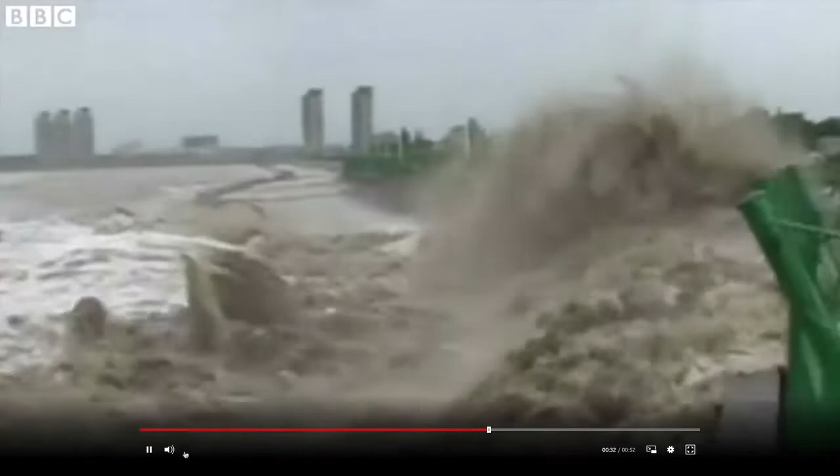Bit late maybe for us because we talked about waves a couple of weeks ago now, but tidal bores are things that happen from high tides in river mouths of a particular geometry, and come up as a solitary wave to invade the estuary, and can be quite violent. They occur in a place like the Bay of Fundy, between Nova Scotia and the rest of Eastern Canada, and the Severn Estuary in Western England as well.

Getting wave after wave, whereas here in China on the Silver Dragon, there's one wave, and it's once a year. So you really have to be ready, have your team ready, water related, and you can go with the flow, and just hope you get a little bit of the Silver Dragon. I think with this event on every year, it's just going to grow and grow, and surfing in China will eventually become bigger.

I don't know if Penn State has a sailing club. Does anyone sail dinghies like this? So you're familiar with this activity. Used to be Penn State had boats to rent at Stone Valley. I don't think they do that anymore.

Royal Air Force No. 617 Squadron attacked German dams in Operation Chastise, otherwise known as the Dam Buster Raids. 617 Squadron was formed specifically to attack 3 major dams that provided hydroelectric power and water to the Ruhr Valley, an area of enormous industrial significance to Germany.

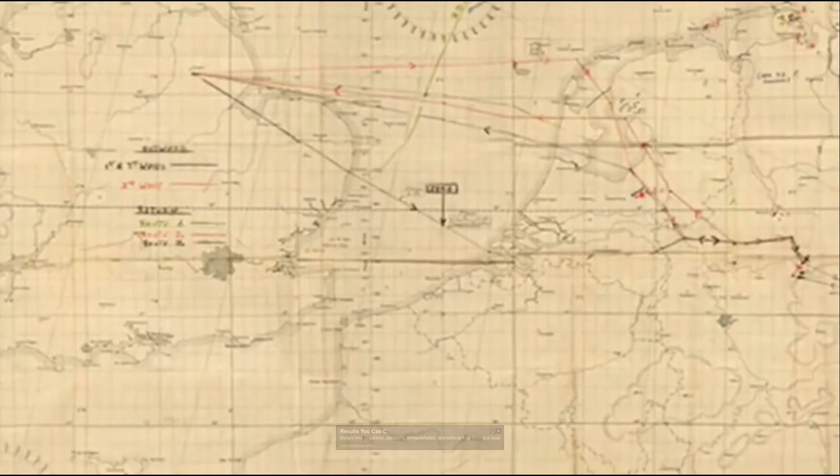The squadron began their mission from RAF Scampton on the evening of the 16th of May. Arriving at their targets in the early hours of the 17th, they breached 2 of the dams and lightly damaged the 3rd. 8 of the aircraft were shot down during the mission, and 53 airmen were killed.

Okay, it's probably about time to get going. So the first few things we already looked at, clearly there's relevance to these. Maybe it's worthwhile just recapping to make the case for the relevance of those initial forays into what we're talking about: pressures on structures.

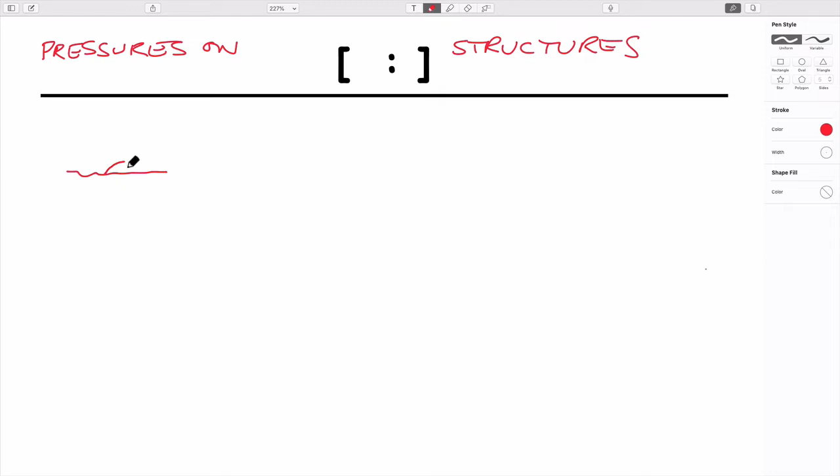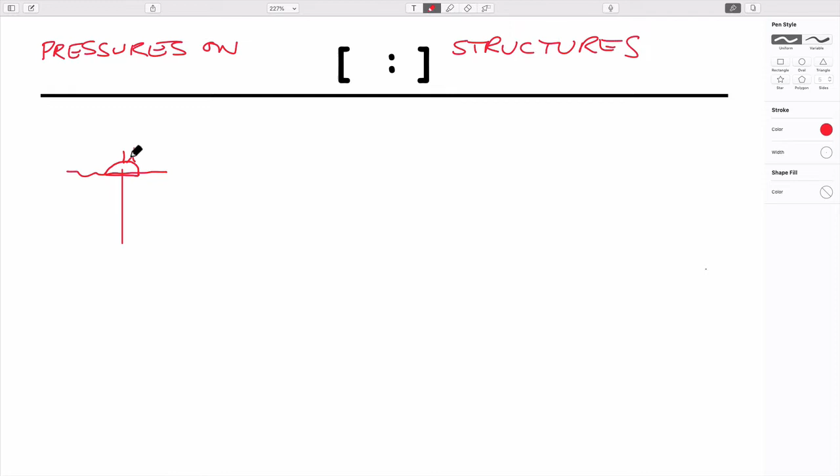So we can probably use those to illustrate the points we're interested in. In the first case, this upside down boat has a sail attached to it, which is a plane, a centerboard, someone standing on here, reefing on this to pull it up.

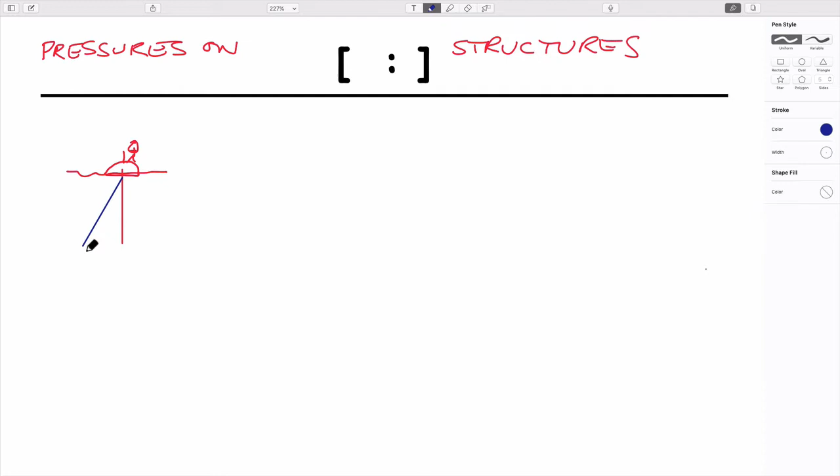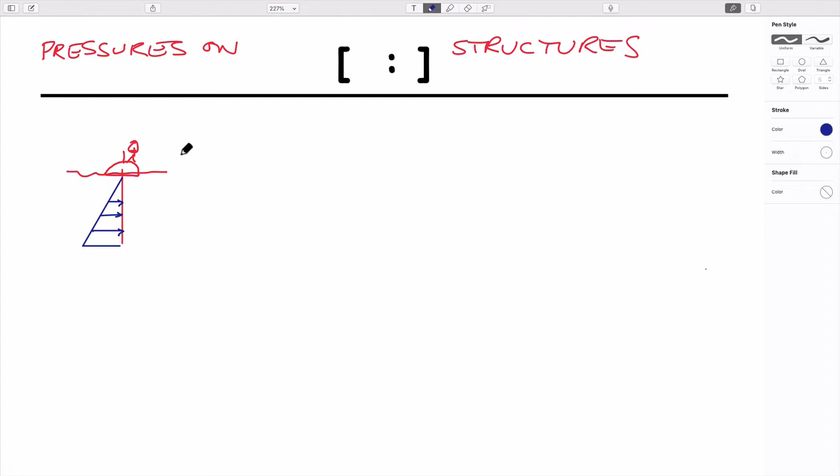Clearly the relevance to this class is that if you look at the pressure distribution applied on the sail - of course the sail can move around a little bit - the pressure distribution applied on the sail is something you have to pull against to right it.

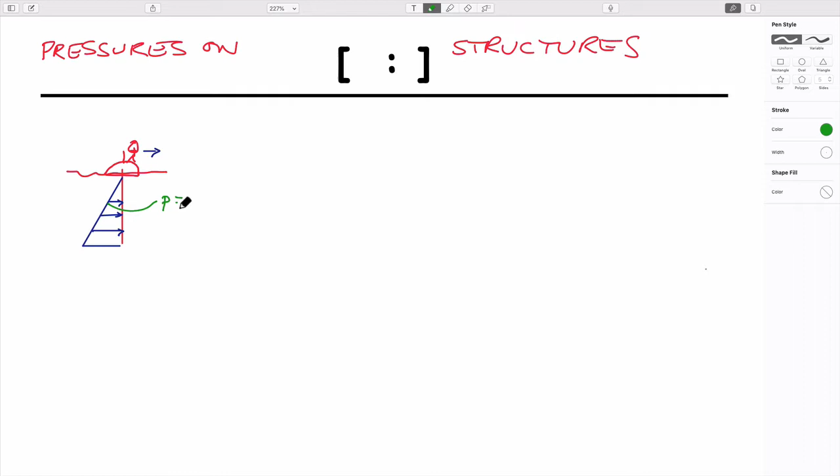So it embodies all the main points we talked about last time: there's a pressure distribution which we can define, because the pressure at any point is equal to gamma h, where h is the depth. We know we can get the magnitude of the resultant force that acts here, and this is always equal to the area it's applied on, the depth of the centroid, and the unit weight of the fluid, which is water in this case.

And as a special case of this, last time we also talked about the location. Is this off the screen? Sorry about that.

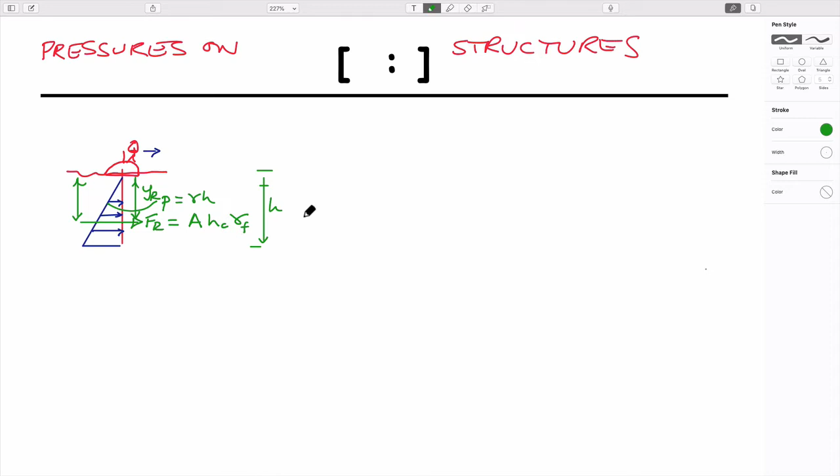We can also talk about the location of where this occurs. If this is h, then this depth to the resultant is what we called y sub r. In our particular case, y sub r was equal to 2/3 of h. hc is the depth of the centroid, which is equal to the height over 2.

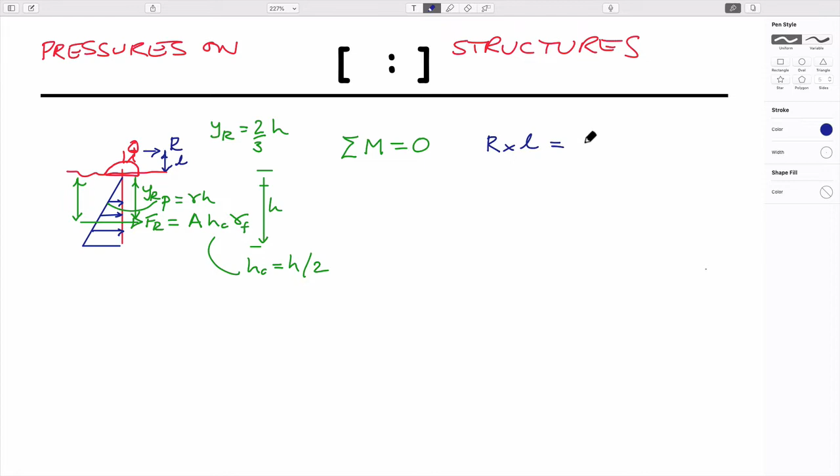So we have enough there to be able to calculate the sum of the moments equal to 0. In other words, this lever arm here - is that on the screen or off? Oh, it's off the screen. This lever arm here, L, and the reaction by the person. So we know that R times L has to equal FR times Y sub R.

So that's kind of really what we're trying to do in a very simplistic way. And so that embodies the three things we talked about last time that we need to be able to do. First, we need to get the force magnitude. And that is, in a generic case, the unit weight of fluid, the area that it acts on, and the depth of the centroid of the plate. We need to be able to find out where it acts.

Which we call YR, the location of the resultant, and it's relative to any particular location, typically relative to the surface of the water, which we developed an expression for last time - but it's not generic, so we'll go revisit that today. And the other point is what I call define a failure mode.

You might remember that we got this point of action by taking moments. It could be around any point - around the bottom of the sail, or around the top of the mast or the base of the mast. You could take moments around either one and come up with this expression. But explicitly, if you want to know whether you can right the boat, the moments have to be taken around the rotation point you're looking at.

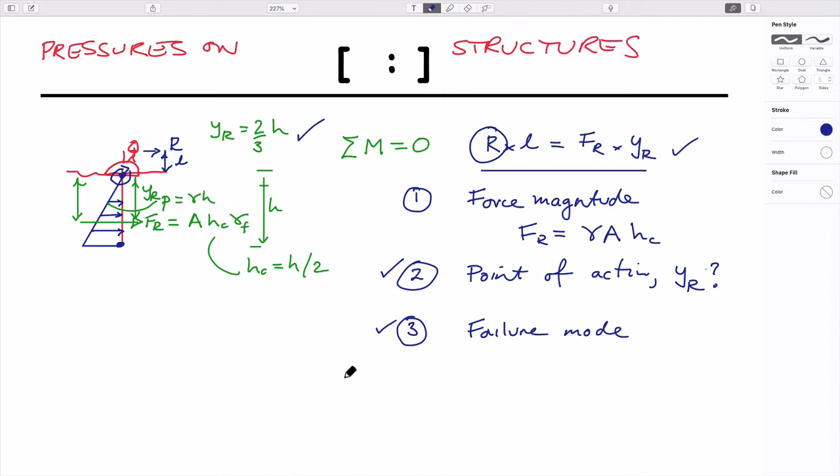So that's what we'll try and talk about today. Two things maybe today. We'll do some examples, but we'll talk generically about how we get this point of action, and we'll do some examples with different failure modes to represent these behaviors.

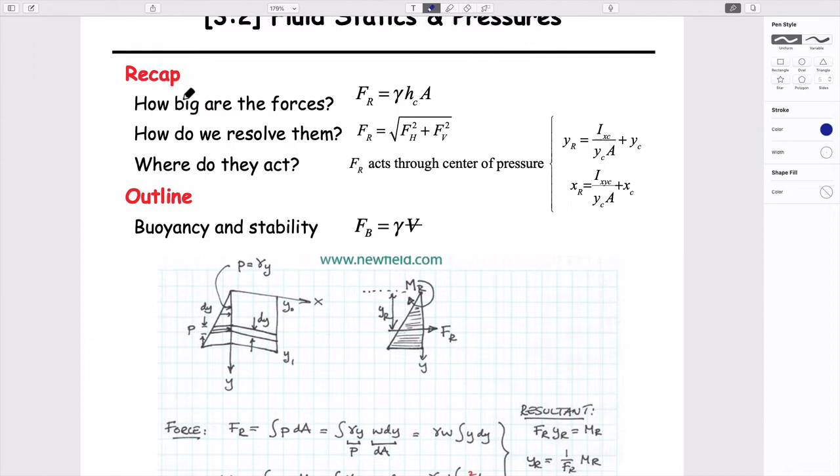Let's see where we are. Okay, so I'll go back to this. Hopefully you can see much of this. Good enough. So those are the things that we've said already. We've made this point that we know how to get the forces.

This is generic, maybe always true. If we have forces in the x and y directions, we can always get the resultant of them - I guess these are horizontal and vertical. We can always get the resultant of them from Pythagoras, which is merely what that is.

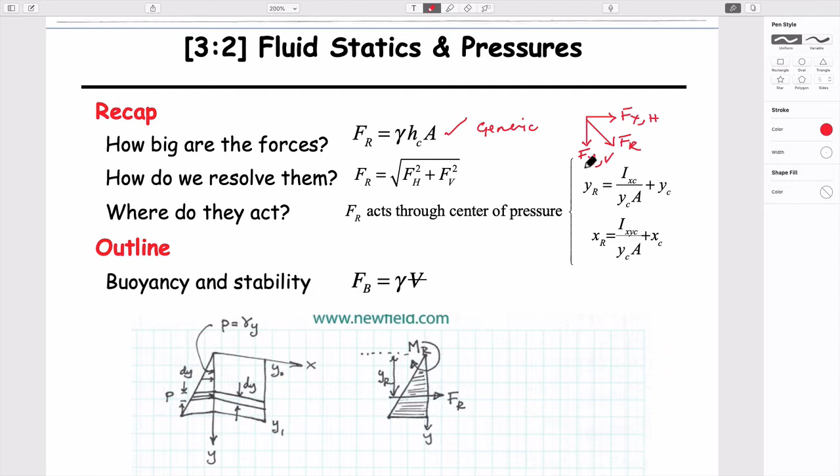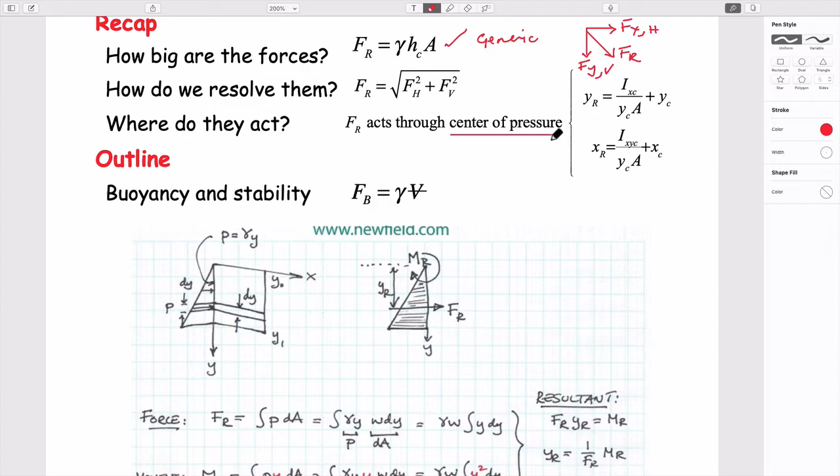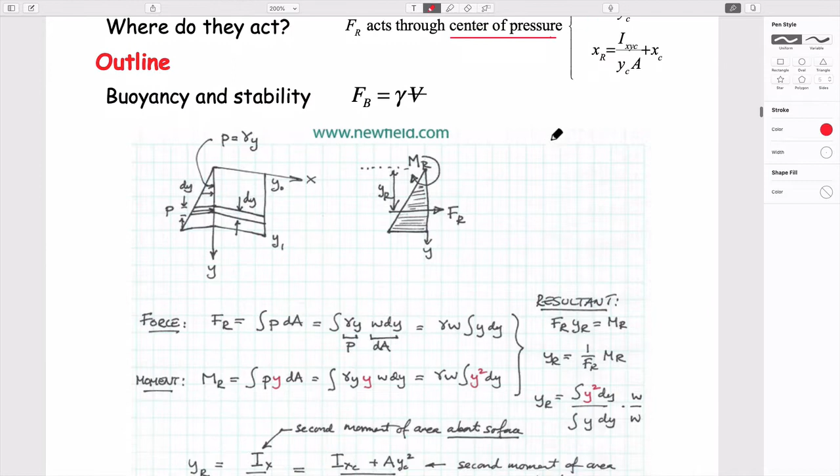And the one thing we haven't yet done is we haven't figured out exactly where this center of pressure is generically. We could derive it, and I think there's a derivation right here that we could go through, but I'm not sure that's particularly useful. But it is useful to maybe look at it in overview.

And this little page of relationships kind of does that specifically. It goes through, makes the case of how we got this force that acts: we take an individual piece where we can define the pressure, and we isolate that force as the area under the pressure distribution, multiplied through by this width across the top. We end up with a prism that goes across here, and comes out like this - that's not a bad drawing, not perfect. This area under here is what we're attempting to do - taking a pressure, multiplying it by an area, which is a width, and a component, which is dy.

And we just sum up all of these individual components. That's what we're doing, that's all an integration is. And if we do that, we end up with this expression here. It includes the unit weight of water because pressure is equal to unit weight times y in this particular case, and we end up with this expression here.

We also know that if we can calculate what the magnitude of this resultant force is, Fr, and we know the lever arm through which this force acts, which is Yr, then that has to be the same as a moment that's applied to this. And so this expression here also has to be true.

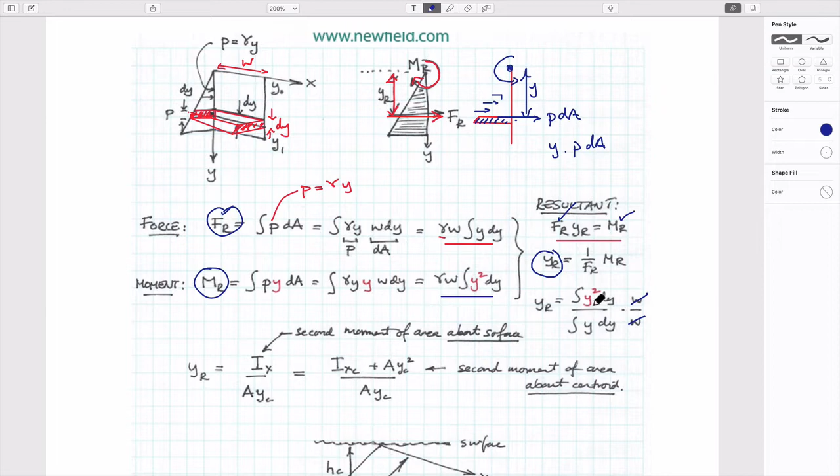And they're very similar to each other. The unit weights cancel out, the widths cancel out, and these integrals have to be done. So this is going to be a third y cubed, this is going to be a half y squared, and we end up with a generic representation in this particular case for the depth of the center of pressure, the point where that force acts. And it's an entirely generic expression.

It doesn't have to be that the distribution passes to the free surface of the water. It can be a plate that's completely submerged. And so this term on the top, well, if you do this integration, you end up with a relationship which is this. This ends up being a second moment of area, as you could imagine, y squared.

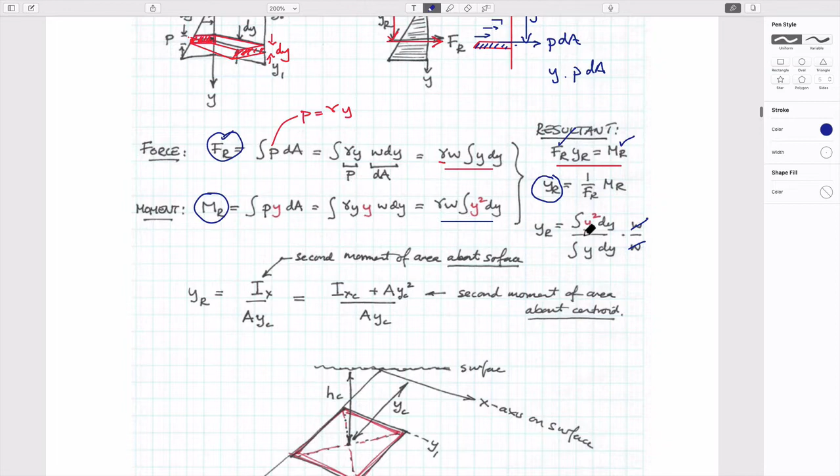And we can use what's called the parallel axes theorem to be able to modify it. So it's a second moment of area, not about the x-axis, which sits on the surface, but relative to the centroid, which is this c. And so the easiest way to think about this is we end up with the point of action of this force, and it's equal to this second moment of inertia, of area, about the centroid, divided by the area times the y-coordinate of the centroid, plus the y-coordinate of the centroid.

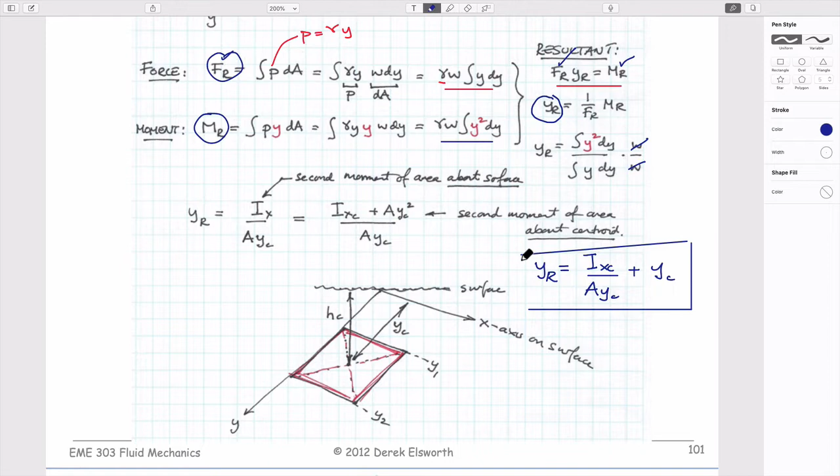So all I'm doing is just dividing this through by this term here. And this is entirely general. It's an equation that you'll use throughout this session. Didn't need to belabor, you'll never have to derive it, but you should know how to use it.

And physically, what it's saying on this particular diagram is that if you have a plate which is given by this outline here, maybe I can do it with a bigger one - where's my width? So if you have a plate which is outlined here, and you know the depth of the centroid below the surface - I could probably have drawn this out myself better.

And the coordinate system we're going to use has the x-axis sitting physically on top of the surface. So the thumb is the x-axis, sitting on the water top, and the y-axis can be oriented any way relative to that. The y-axis has to go through, so the xy plane contains this plane itself.

The upper limits are y1 and y2. And the slope distance, or the y-coordinate of that particular point, is y sub c. That particular point is the centroid of the plate. So the centroid of the plate is just the balance point. Did it last time, right? I could do it with this. If I balance this on my finger, that's the centroid of this plate as it sits here.

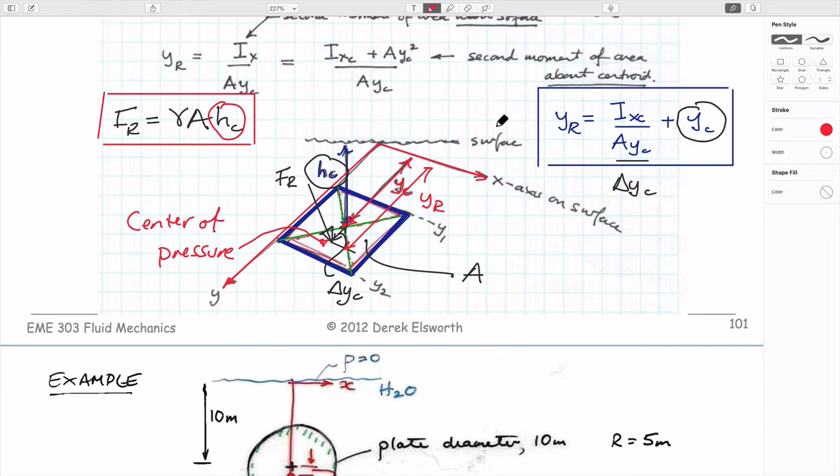So with these two pieces of information, we now have the ability to calculate the forces and their point of action on any flat plate, any orientation - horizontal, vertical, intersecting the surface or not. So maybe the best way to consummate this is to do an example of which we have a number. What I didn't say is that these are standard terms.

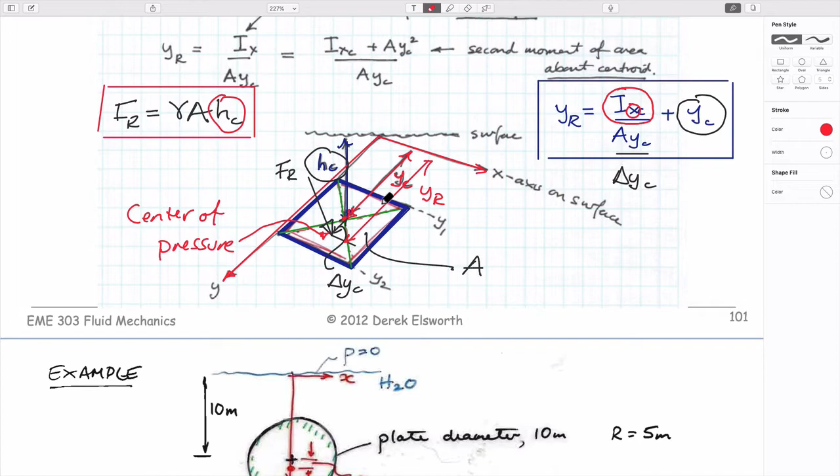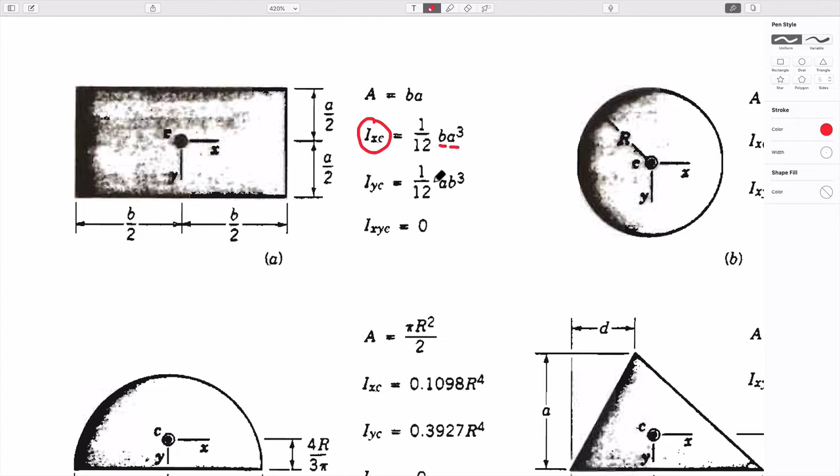This is the second moment of area about the x-axis relative to the centroid. It's a kind of long term. If you look in your book or in these notes, you'll find it somewhere right here. So for a plate, it's equal to this - it's a function of the edge dimensions of the plate. And this is the one that typically you'll use.

It's just a number that you'd use relative to a plate that looks like this, which is B in width and A in height, that might have the water anywhere relative to that. Or for a circular plate - the first example we do is for a circular plate.

And again, the water is here. If you wanted to draw the coordinate system we had, this would be the x-axis, which sits on the surface. This would be the y-axis, which would go through it. In our particular example, it's a vertical saucer, if you like. And this is the centroid. This would be the height of the centroid in our particular case.

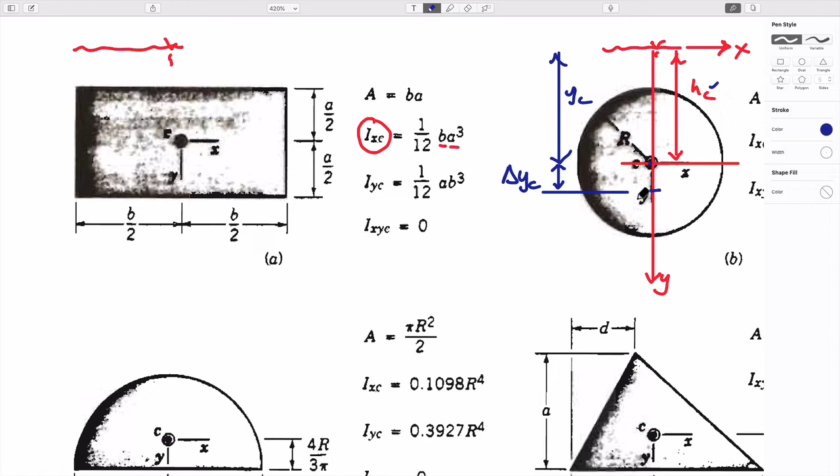Okay, so these are standard results. And so the standard result that we'll use here is that this second moment of area about the x-axis relative to the centroid is pi r to the 4 over 4.

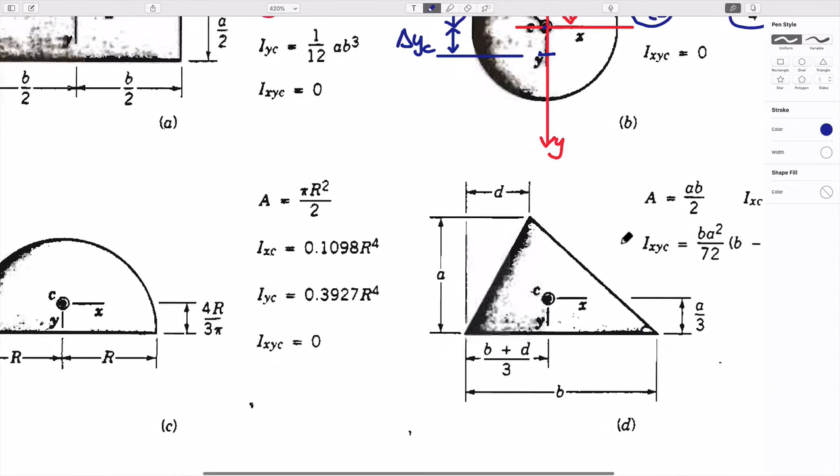And I suppose the other thing we'd note, well, we'll talk about that later. So this is a term that we're probably going to want to use.

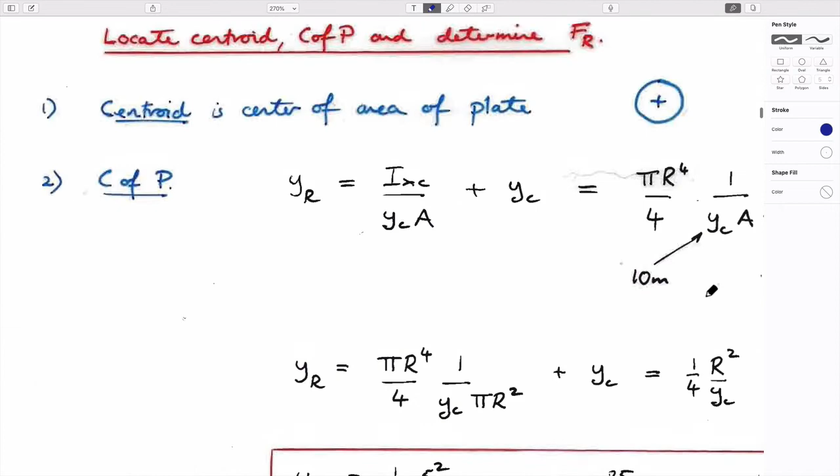And you'll see this result here. It's a pretty straightforward question. I guess they're all straightforward when you've seen them multiple years as I have, but maybe not the first time. So we have a gate here.

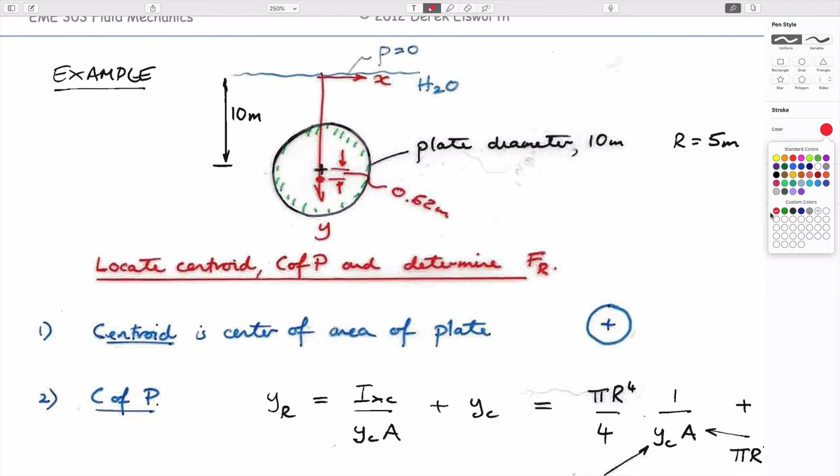If there's a picture of a gate, they have it. It's a side view, and the idea is that you have a gate which is circular. It has a pivot right here. We think the resultant is going to be below the centroid, which is the pivot.

And so if the net force acts here, it's trying to push it counterclockwise. So the question basically is, what kind of force do you have to apply here to stop it from rotating? Just a simple moment balance. We don't need to know that to calculate the magnitude of the force or where it acts, but that's ultimately where we're going with this.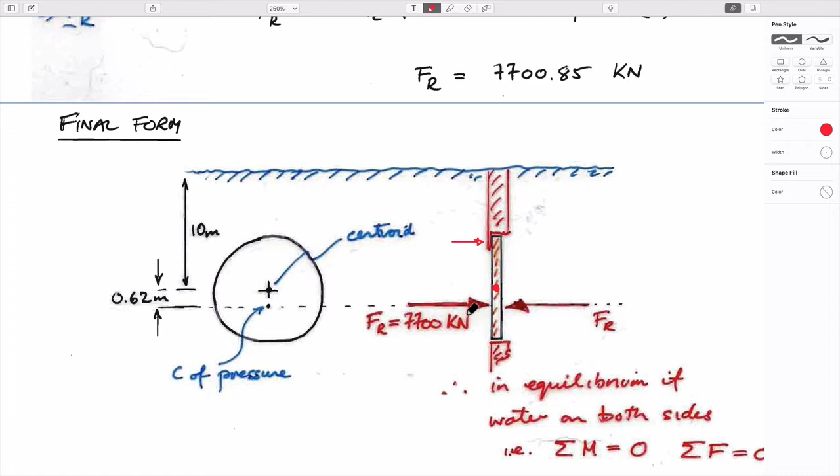So the question is, what's the magnitude of the force and where does it act? This is the plate. The center of the plate is 10 meters below the surface. The plate diameter is 10 meters, so the radius is 5 meters.

So the centroid is right in the middle, which would be a depth of 10 meters below the surface. That means this is also what we'd call H sub c. And I guess we'd also call this Y sub c, because the plate's vertical. If the plate was inclined, then H sub c would be a smaller number, and Y sub c would be a larger number off to the side.

So we know the centroid of the plate, and we know its depth. The center of pressure we can calculate. It's equal to this expression here. We said before that this is equal to pi r to the 4 over 4, which should always have these dimensions of length to the power 4, divided by yc, which is 10 meters, and divided by the area, which is pi r squared.

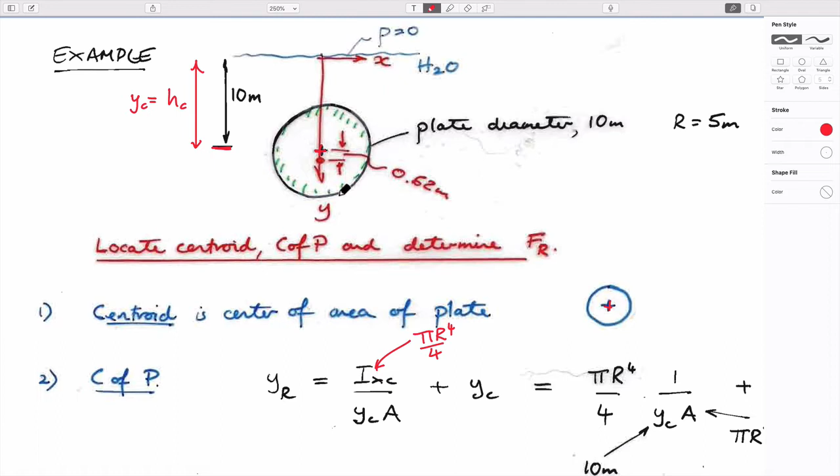And so if you make those substitutions, this here is I sub xc. This is the depth of the centroid, which we said above is 10 meters. And the area is pi r squared.

So those are the individual terms, and we also add this amount to it. Going through the math by substituting the numbers in: this is yc, this is r squared over 4, the pi's cancel out, and yc is 10. So it ends up being 10 plus 25 over 40, which is 10.62.

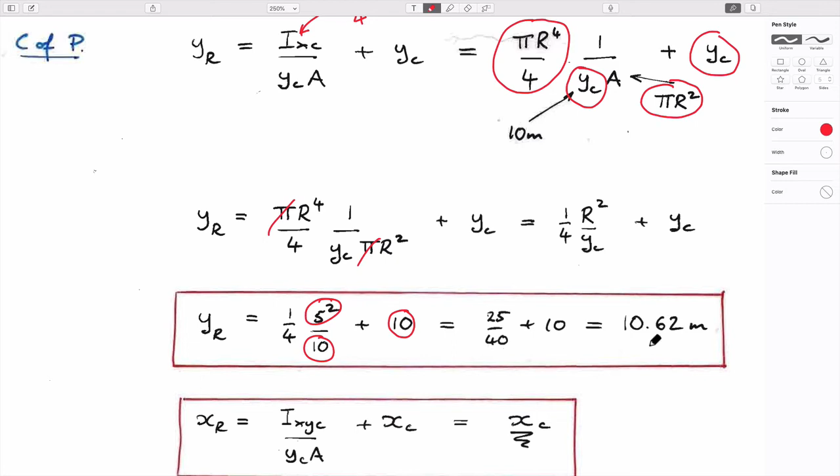And that corresponds to exactly what we surmised, that the point where this acts is not at the centroid, but some small amount below that, which is equal to 0.62 meters. So that's the amount.

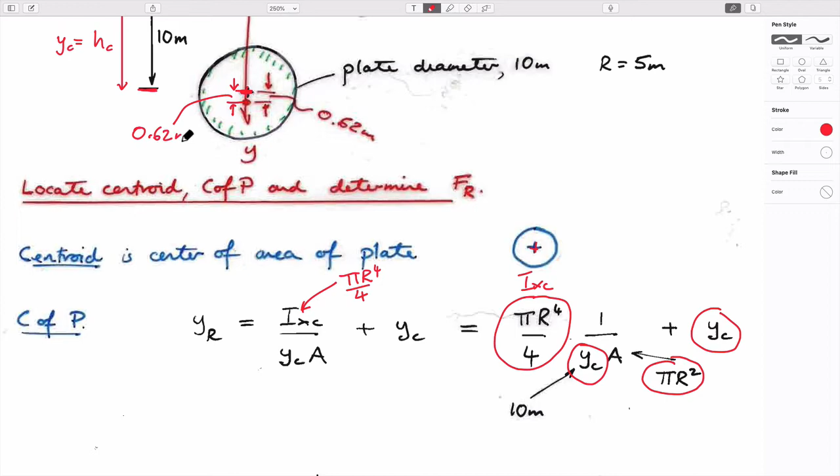We can also do the same thing relative to, we haven't really talked about it, but you can see just by inspection, if you look at this plate and go across it horizontally, even if the plate's inclined or vertical, the pressures are going to be uniform. It's not like going down in the fluid where pressures increase, and that's the reason we have this discrepancy between the centroid of the plate and the center of pressure.

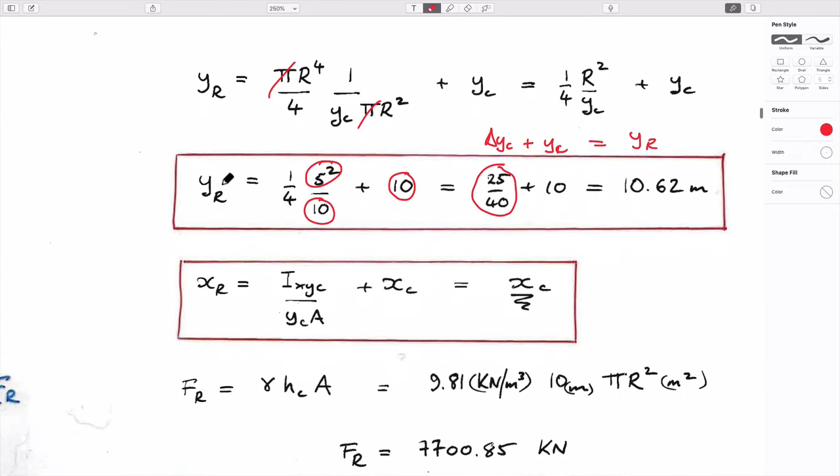If you go around here and took moments around this vertical axis, you'd find the forces acting on the right side of this plate would be exactly countered by the forces on the left side if you use the central axis. So it basically means the centroid of the plate is in the middle, and there's no net rotation around it. This is the expression we can use to define that.

Don't worry about it, not so important. We have the point of action, and we can calculate the magnitude of it.

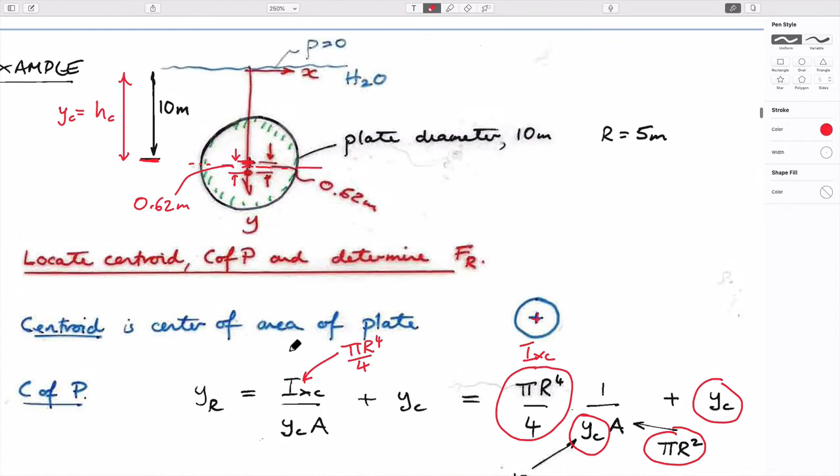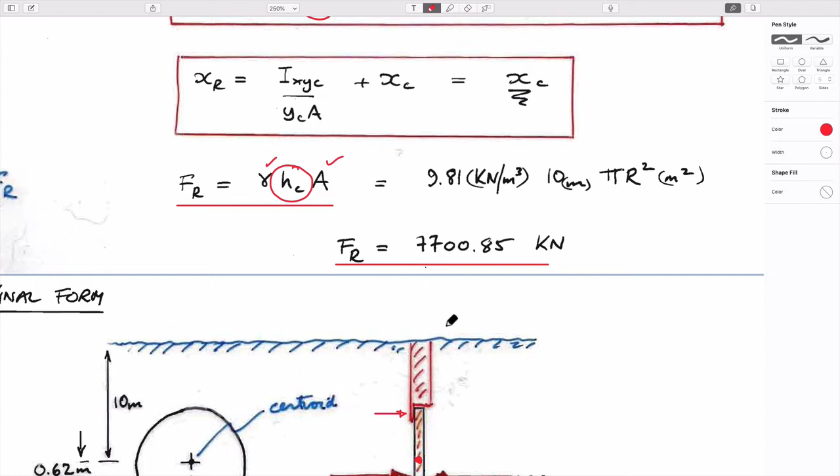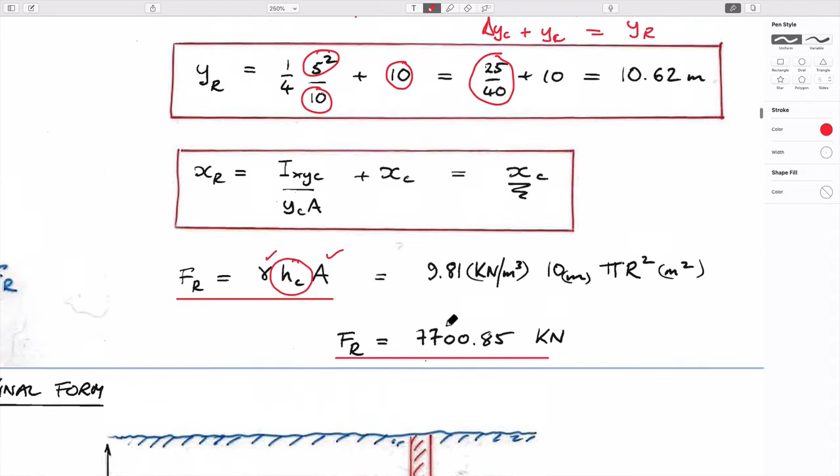So we've done two things, but we want to do three things. Magnitude of the force, Fr equals gamma A H sub C. The location of where it acts, Y sub R, is equal to the depth of the centroid, YC, plus delta YC, which is this slightly complicated expression, but not too bad.

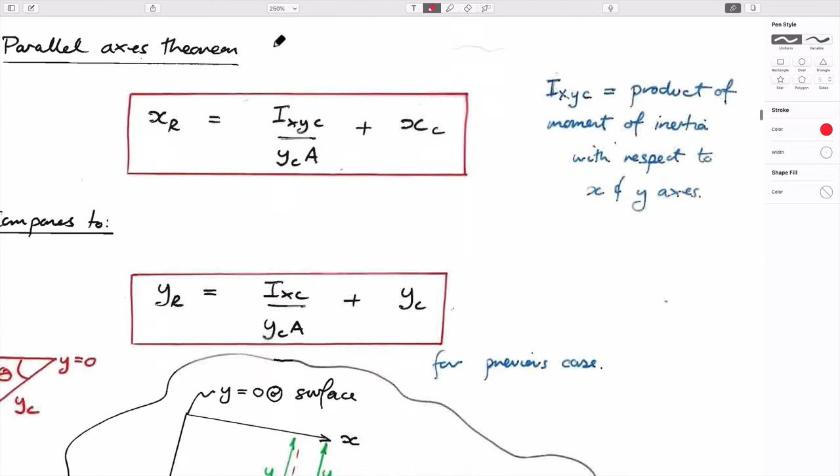How did you get IXC equals that expression, if you scroll up just a little bit more? Pi r squared, pi r to the 4th over 4 for IXC. Okay, standard result. From here, all right, so you'll use this table. So it's a standard result, worthwhile knowing. That's where it comes from. Right? Good.

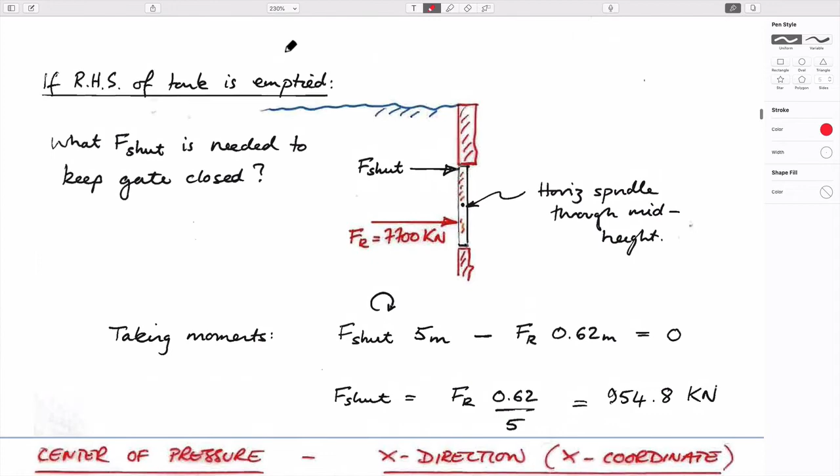It's worth making the point that to get those forces and the points of action, we could do it from first principles by taking moments, and we could do it around any point we choose, and we'd always come up with the same result. But if we're looking at a failure mode, there is only one point to take moments about to do it. That's an important point.

So now if we take moments, then it's going to be something like Fr multiplied by the lever arm R has to equal reaction times L. No, I don't want to use R, do I? But I'll do that.

So what do we know and what don't we know? We certainly know that L is equal to 5 meters. Pivot in the middle, 5 meter radius plate. We certainly know that LR is equal to 0.62 meters, not 10.62. It's just the distance between here, so this is L sub R. And we definitely know that this force is equal to 7,700 kilonewtons. So the only thing we don't know is the reaction.

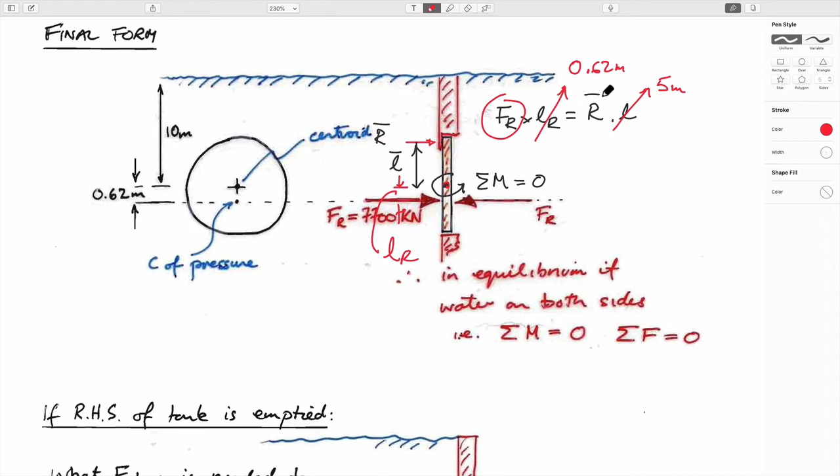And if we go through the math, we end up... okay, let me back off. Right now, with water on both sides, the force acting horizontally is exactly the same as the force acting left to right and right to left, because they're both acting on the same thing.

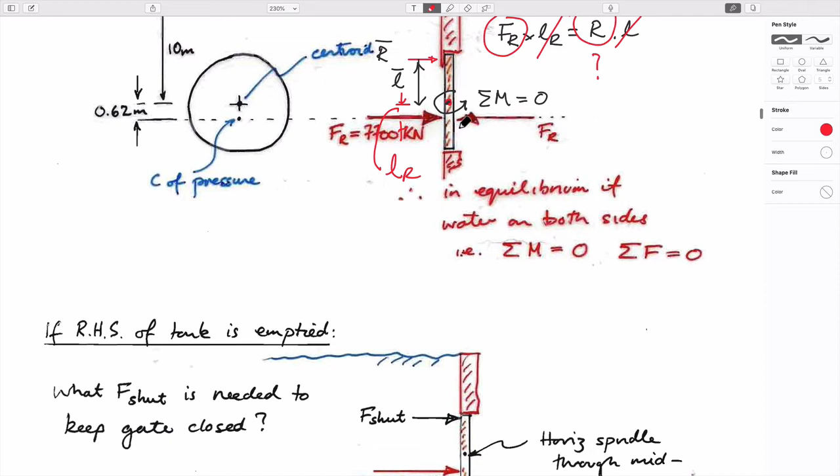If you drain this side, then clearly that's not the case, and you have this condition here. So certainly if you have this acting here and this acting here, there's no moment and the gate stays shut, in exactly the same position it is without any backstop. But if you drain the right-hand side, there's a mismatch because you have pressures acting on this upstream side, which will look like this, and zero pressure acting on the downstream side. The relative point of action of this is below the pivot point, so there's a moment applied.

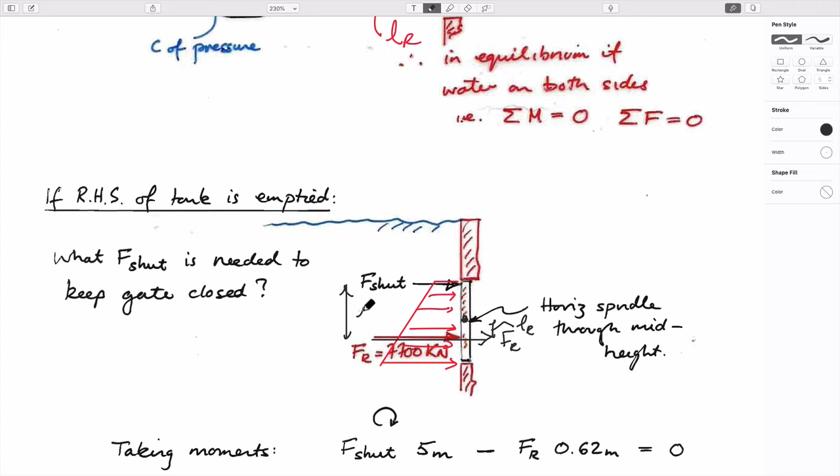So this moment of FR times L, what we call LR, has to equal F-shut times this length here, and this was L overbar. If you go through the math, you end up calculating that the force to keep it shut is much less than 7,700 kilonewtons, because you've got a long lever arm there. You could surmise that from looking at the geometry.

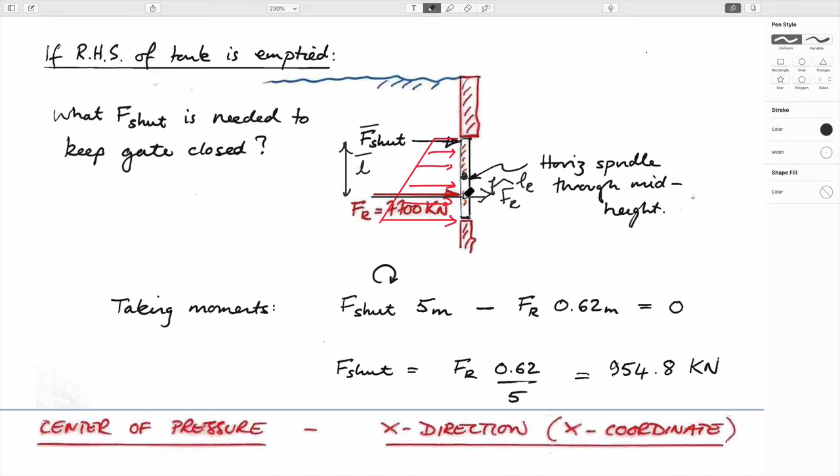In fact, the magnitudes of the forces should be in the ratio of 0.62 over 5 — the ratio of these two lengths, which is this.

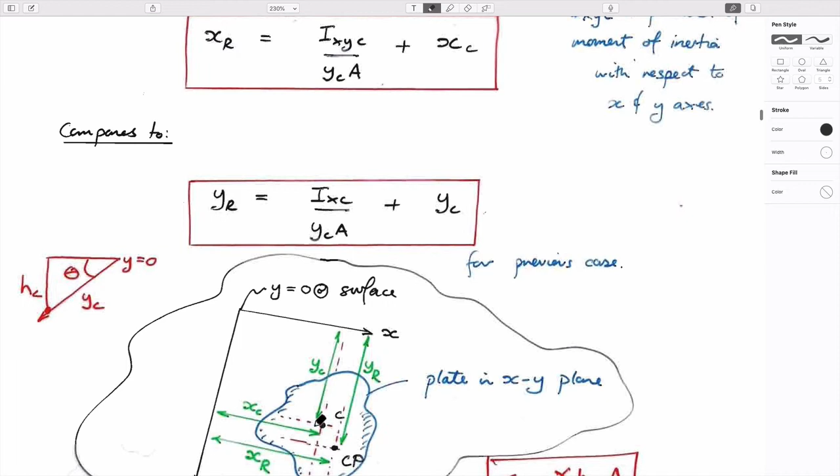So the point is, hopefully we've made it, that this is an absolutely generic expression you can use for a flat plate — only for a flat plate. If it's curved, I don't have anything curved here to show you, but you can't use it for a curved surface. You can always use it for a flat plate, and that flat plate can be below the surface and any shape. The two important things to pull out of it are that you need to be able to define the centroid for that plate, which is again a standard result on that sheet we just looked at for the IXC terms, and physically it's the balance point of a surface.

Not too bad, right? That is the centroid of that plate. But the force acts at the center of pressure, and the center of pressure is offset from that balance point by some amount, which we've called delta YC.

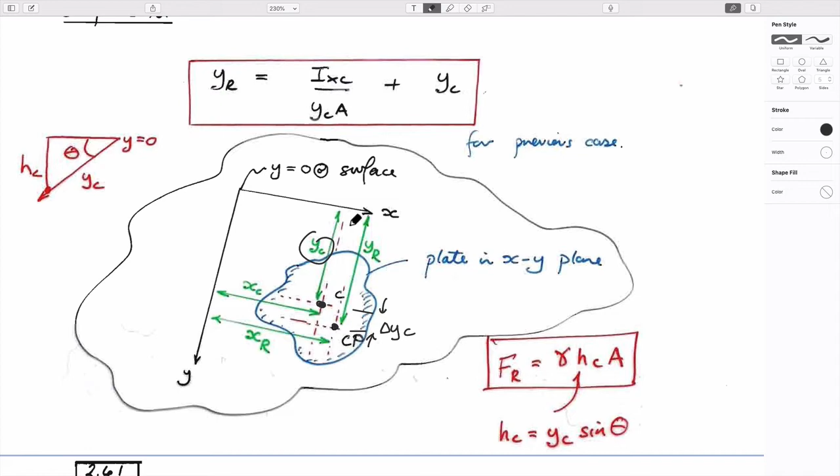YC is the depth of the centroid, slope depth of the centroid. Delta YC is the point below that where the resultant F sub R acts. And sometimes it could be offset. It might not be in the same line as that, and it depends on the shape of the plate.

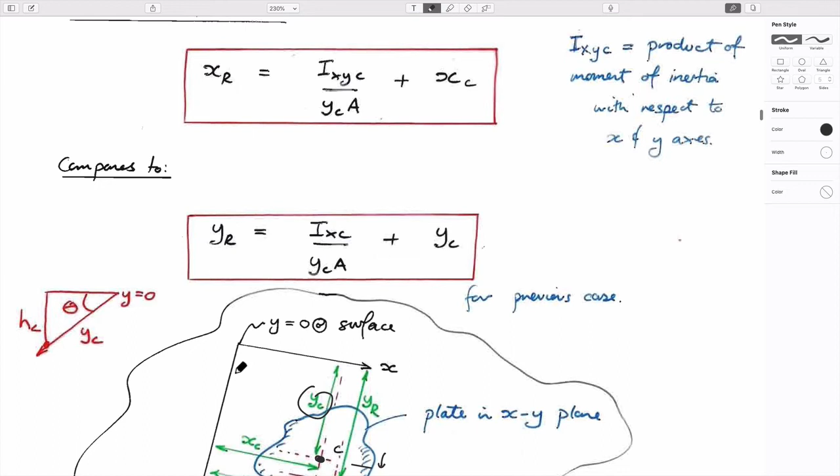For most regular shapes that we deal with, we can also calculate where it is by taking moments about the y-axis. If you use the y-axis as the rotational axis here, and take moments of the forces applied on this plate as you go further away, you can calculate the location of the center of pressure, which might be offset a small amount to the left or right of this centroid. You can do it by using a standard result with these individual terms which we've already just used.

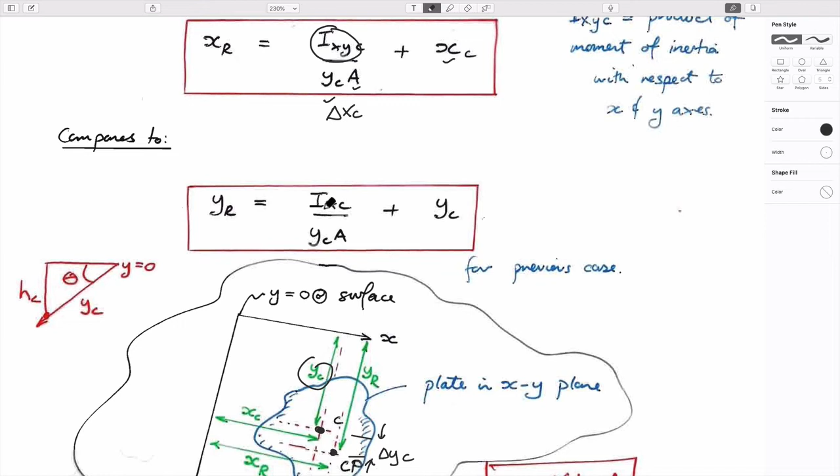This is x sub c, in other words, it's offset by some amount to the left. This would be delta xc. This term here is what we've called delta yc. And so this term here, in this particular case, this length here is delta xc. Rare that you'd need to use that. Things just get too complicated when you use shapes that really aren't symmetric for this class.

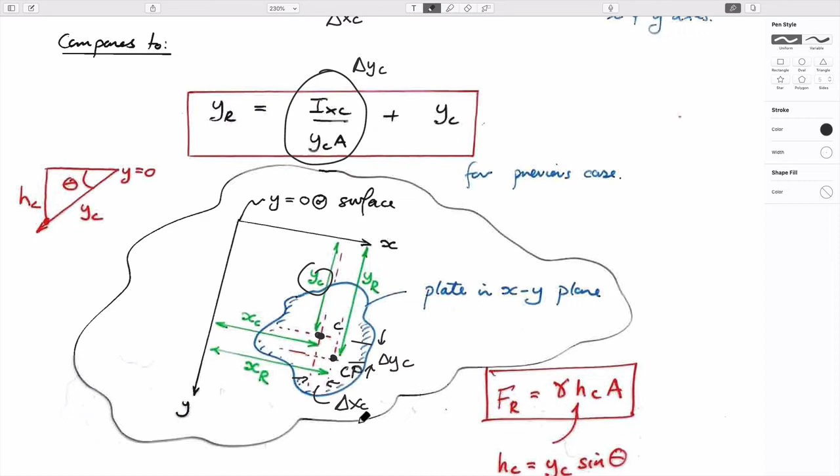Okay, so that's kind of the hallmark of what we'll attempt to do. So let's do some other examples.

Same kind of deal, and you'll see that we can solve things in a variety of different ways. But this is again one from the book. Same idea, so you have a hinge, which is a pivot. We want to be able to calculate if we have water held behind this gate, what force do we have to apply in this direction, P? Might as well make it big. What force do we have to apply in this direction to keep it from moving?

So if we think about this, we could imagine that we could represent it as a system that has a couple of different components. There are two faces, so we're not just dealing with one face now. We know that we'd have some kind of pressure distribution on this plate, which I'm not going to draw there, but I'll draw slightly differently because it's easier. So we have a pressure acting on this face, pushing this plate in this direction, and I just want to draw it here because it's easier for me to do that.

And we also have a pressure acting along this base, which again I could draw as being this, but instead, just to make it different, I'm going to draw it down below.

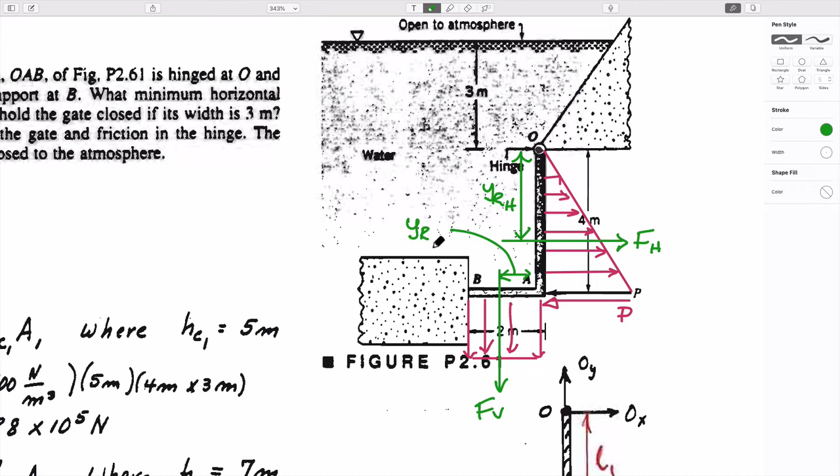So you can imagine that what we might want to figure out is what is the magnitude of this horizontal force, and relative to this, where does it act? And also, what is the magnitude of this vertical force? And also relative to this coordinate here, I'll call it LR—because it's not really, but it is kind of a YR, or maybe I'll call it Y, maybe I'll call it YR V, for vertical.

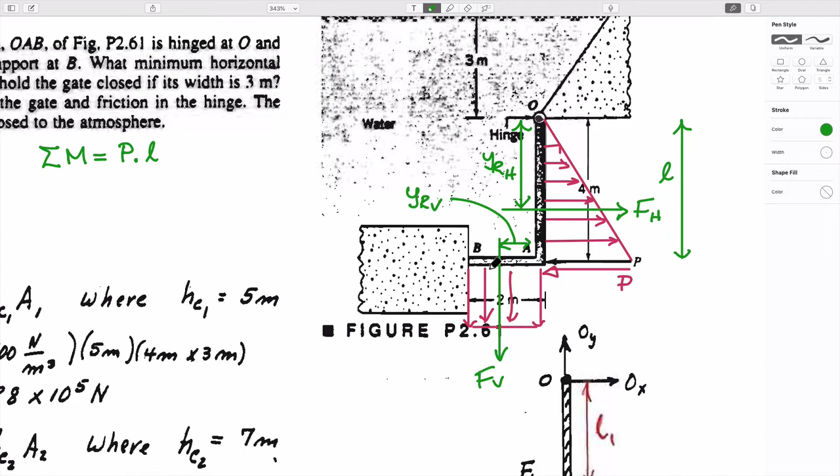So clearly, if we're summing moments with all of those terms, we can write that P multiplied by L—this force here times this lever arm—has to be able to resist the horizontal force multiplied by YRH, and also the other counterclockwise force would be this FV multiplied through by YRV.

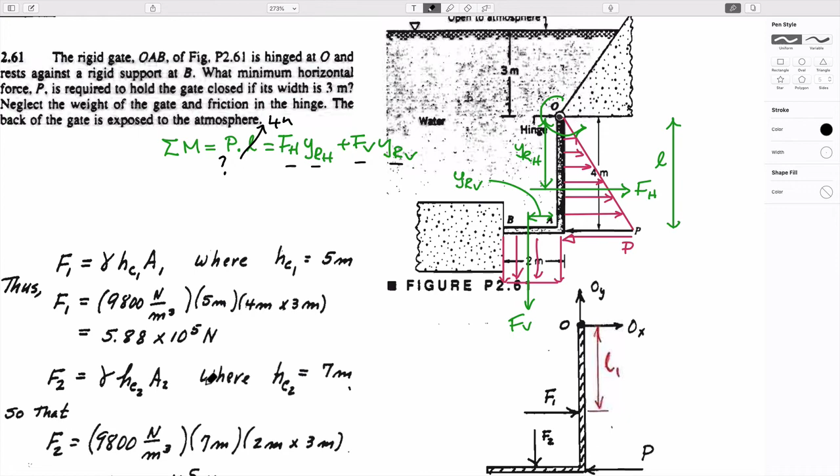So of these, we definitely know what L is. L is equal to 4 meters. We don't know what P is. But we should be able to calculate what each of these are from what we've said before. So you have those values there. I'll make it smaller so you can see them. Won't go through the numbers.

So the horizontal force, this is force 1. So the magnitude of the force is going to be equal to this—I'll change colors so you can actually see what's going on. So force 1 is going to be equal to the unit weight of water times the depth of the centroid multiplied by area 1. Depth of the centroid is what? 3 meters. The balance point of this plane is going to be this, so it's going to be 2 meters down it. So this should be 7 meters.

And the area is going to be 4 meters, and it's something like 3 meters into the page. So this is going to be 4 meters times 3 meters. Just the area of this gate, nothing more.

7 meters, I can't add, can I? And you didn't correct me. So 3 meters plus 4 over 2 is actually 5 meters.

Which is this. And if you go through the math, we can calculate the magnitude of force. The force acting here acts on this surface. It's actually also very easy to add. On this surface, the centroid has to be in this plane. So we know the depth of the centroid has to be 7 in this case.

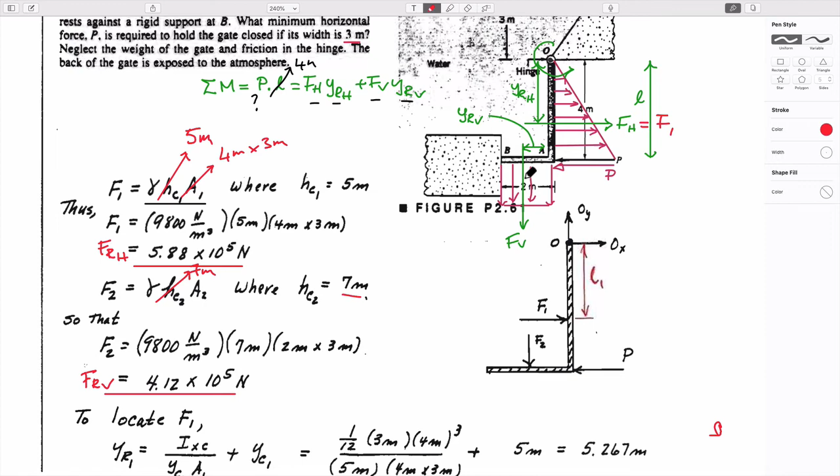And now we need to work out where they act. This one's pretty easy, because we know that just by the symmetry, it has to act there. There's no pressure distribution as you go, no change in pressure as you go across it. And so clearly the depth, the location where it acts, is in the middle of this plate. So that's straightforward to get.

And the other one's a bit more challenging, right? We need to use this parallel axes theorem. So we need to know where the centroid is. The centroid is going to be 2 meters down on this plate.

And so I guess, can you see this? If I draw it off to the side, this is drawing it in perspective. And this, y sub c to the top of the surface is this. This is to the water surface. So this is y sub c to the centroid.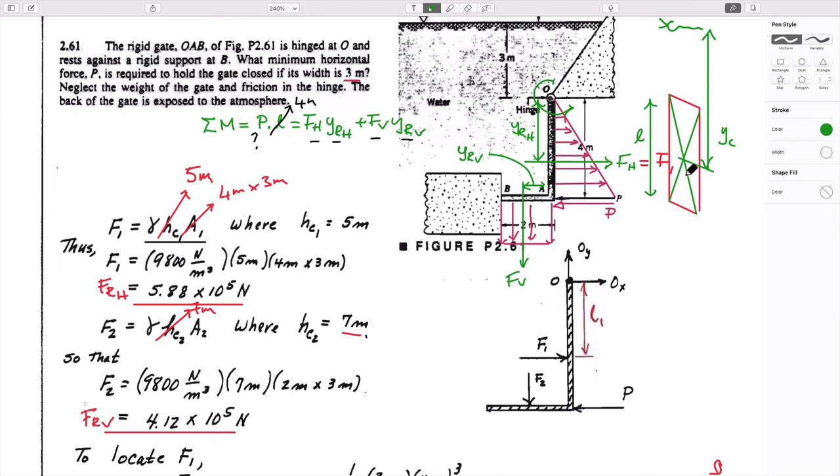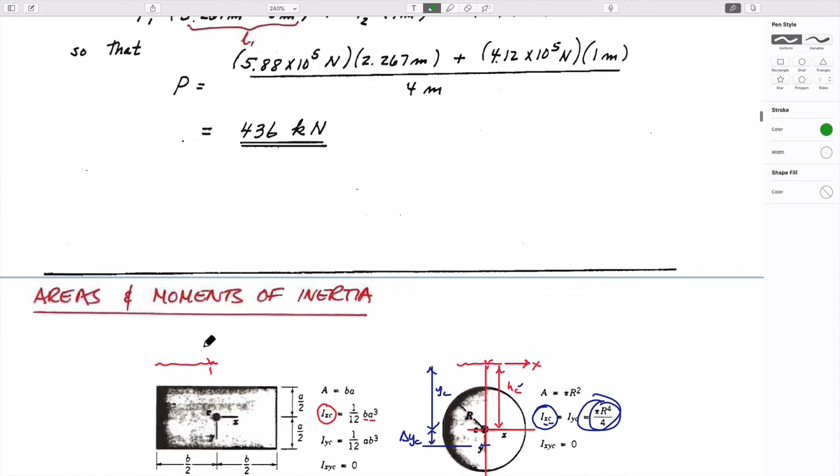And so we can use this. So we know that for a rectangular section, conveniently right here, the magnitude of this term is this. Standard result. B is the width, A is the depth. Has to be that way.

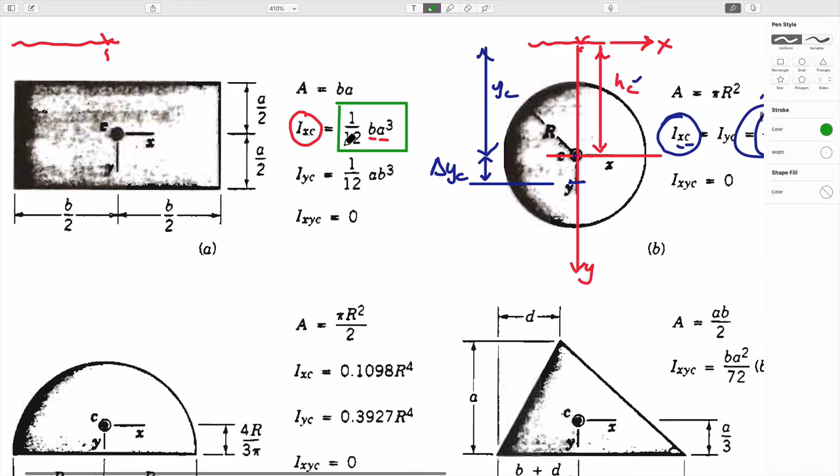And so we have to be careful to use that. So A is the depth cubed divided by 12. And so if we use that in here, then this is...

The term YC1, which we've just calculated, is going to be equal to 3 meters plus 4 meters divided by 2. So that's 5 meters again, hopefully. This is here. This is going to be a 12th, width 3 meters into the page, depth 4 meters. This is 4 meters deep to the power 3.

The depth of the centroid is the same here as it was before. And the area of the plate is 4 meters deep, 3 meters into the page. And so if we come up with that, we end up with a magnitude of 5.267 meters, which basically says that on this mock-up of the length here, this is 5.267 minus 3, because the height above here is 3. This is equal to 2.267 meters.

Standard result for the vertical one, it's always going to act. The centroid is the center of pressure, so it acts in the middle. And so we know that this length here on the bottom is 1 meter.

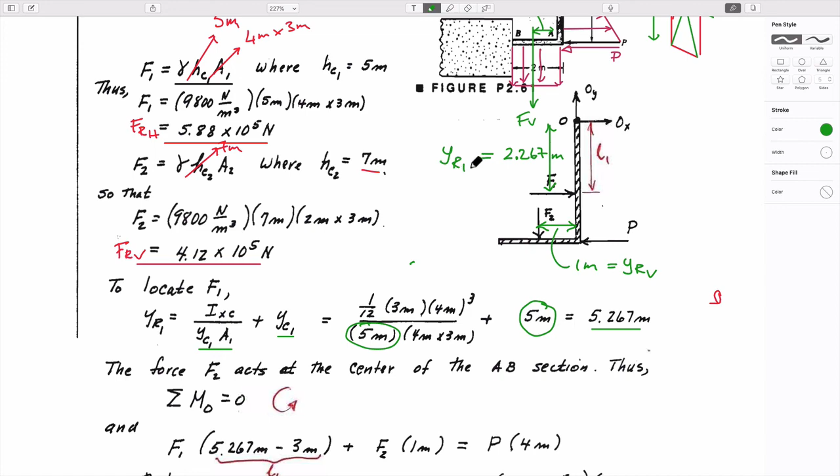Which is equal to YR vertical, and this is equal to YR horizontal. And the rest of the calculation is just to do the... sorry, let me correct that. This is not YR horizontal, is it?

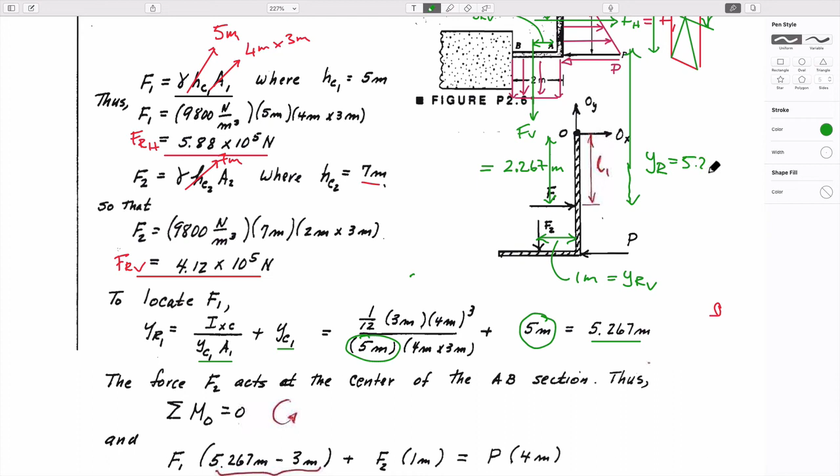This is the lever arm, vertical. YR horizontal is the full length up to the surface, which is equal to 5.267 meters, right? So this is the location where it acts.

If we subtract off the 3, we've said that to be able to do this balance between a failure mode, we have to write it relative to the failing relative to this pivot. And so if we do that, then we have exactly this expression at the bottom, which is the horizontal force multiplied through by the lever arm, which is 5.267 meters minus 3 meters, which is the depth of this point, which is 2.67, so this is 2.267 meters. We have this vertical force, which is what we've called FV or FRV.

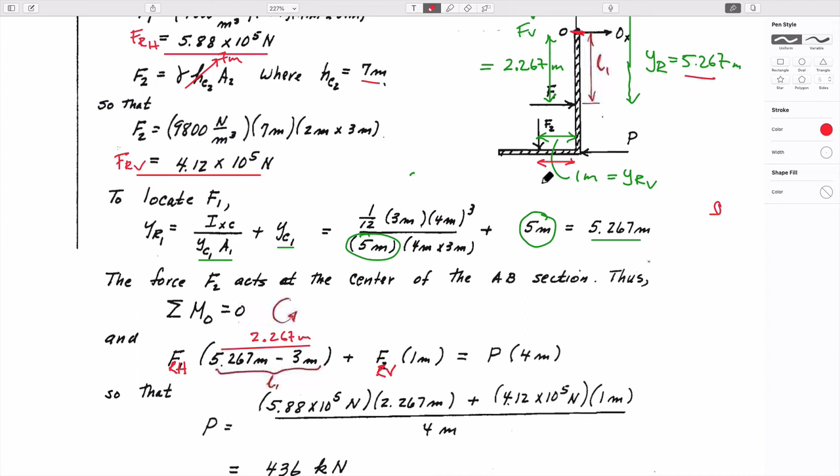And the lever arm here is 1 meter. So forget that, that's not right.

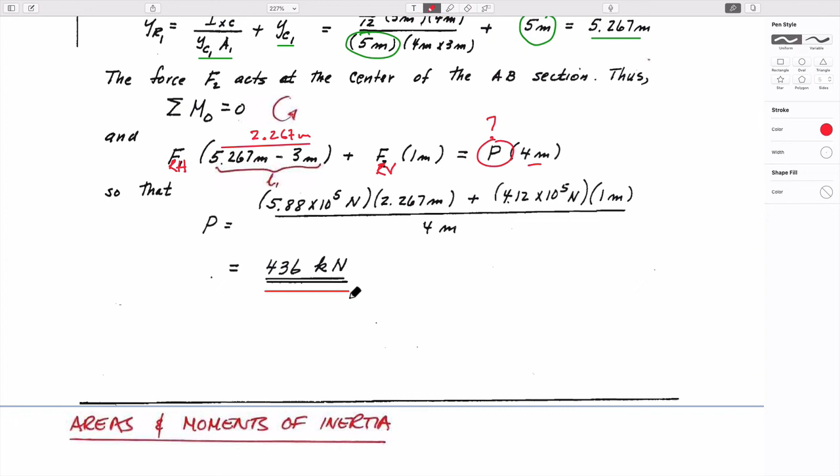We know that this force here is being placed a total of 4 meters away from the pivot point. The only thing we don't know is this, and we can solve for that. If we do that, we end up with some number, which we may or may not care about. But basically, that number is the force we have to apply at this point to stop it from opening up due to the horizontal push of the water and also the vertical weight of the water that acts as well. So that's just one way to do it.

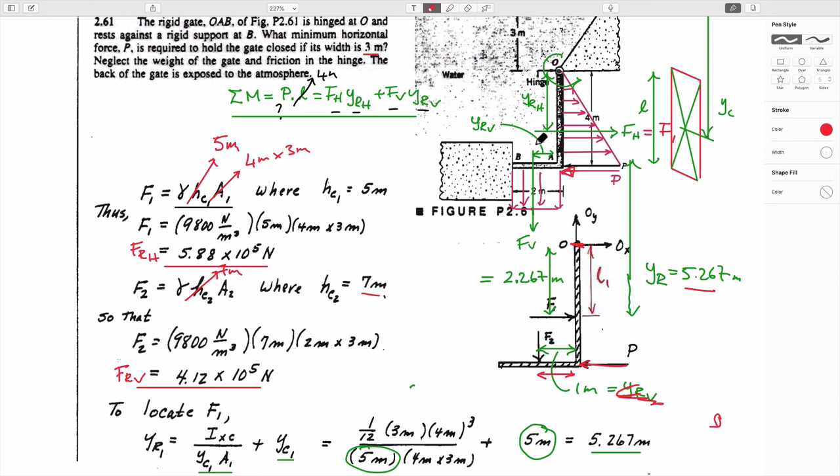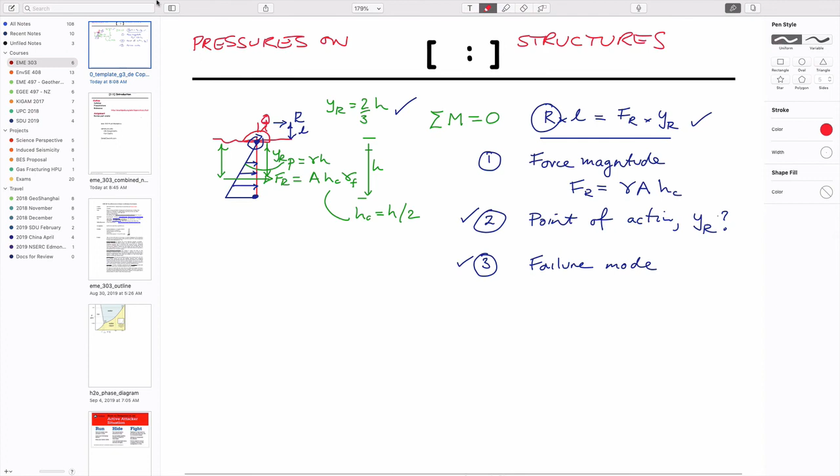We have a few minutes left. Makes sense? Hopefully it makes sense. Yes? No? Hopefully? I should know never to ask that question. Just forge ahead.

There are more than... we could solve it in a variety of ways, and I don't know if I'll have enough time to do this. But in our particular geometry, relative to the water surface, the way we solved this, you saw exactly what we did. We did this, and we did this, and we calculated what those overall forces were and where they acted, and we solved it by doing that.

However, we could also, let's see if I can be smart enough to do this. Oh, that's fantastic. Can you imagine that? The skill. You could imagine solving it another way. I wasn't smart enough to actually do these erasures before I did this. Let me do this again, just to show you how clever I am.

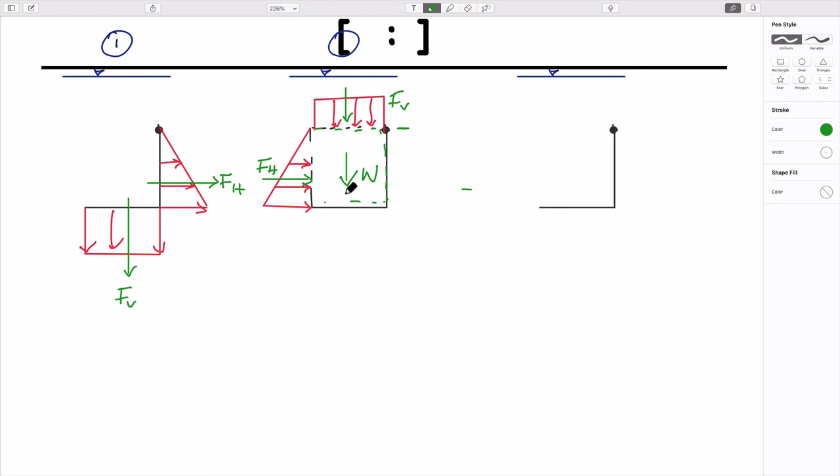The pressure acting on this upper surface, which would be equal to the water acting above it, and also the weight of water in this zone here. So in other words, if you define the horizontal force acting here and the vertical force acting due to the water above this point, you'd get exactly the same result because it's physically the same system. This triangle gives you exactly the same force acting in the same direction as in the previous case. And if you think about it, this weight of water plus the pressure acting on this surface gives you the same force that would be acting due to the pressure at the bottom. So the systems are both equivalent to each other.

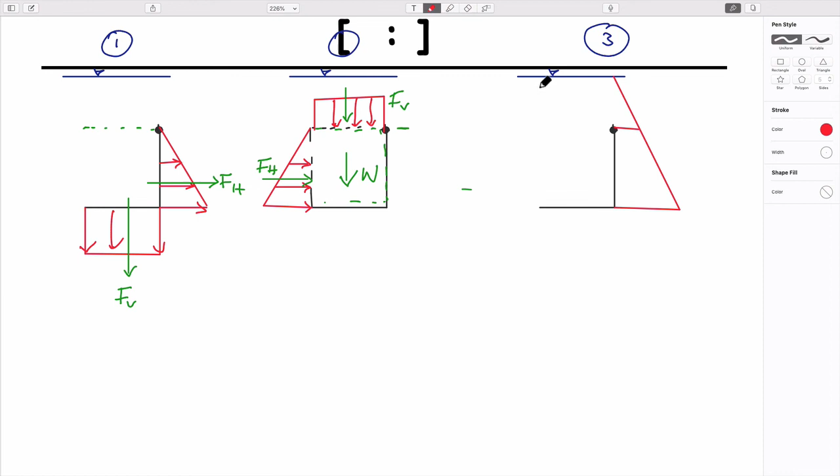The third way, let me do it, and again I don't want to confuse matters, but just to make the point that you can solve these problems in a variety of different ways. The other way you could solve it would be by doing this. And now the weight of the water acting downwards. This would give you exactly the same result as well.

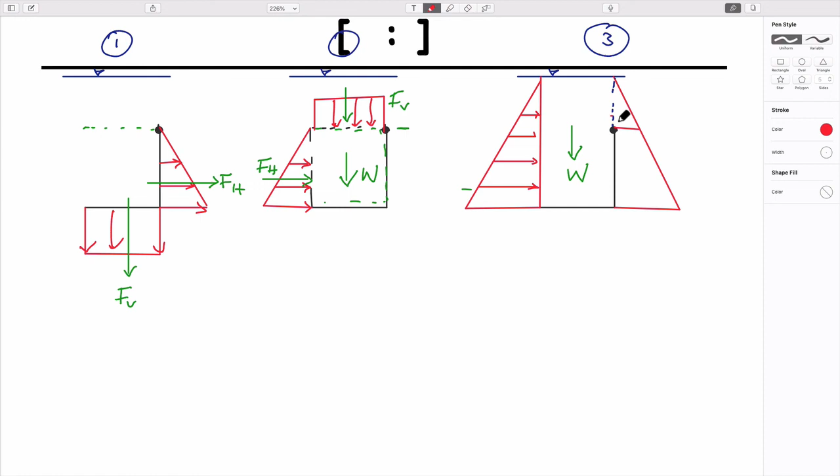In this case, we have this force acting here. We don't have any force acting here because it's got to come through the gate, but we have this force acting here. So if you remove this force, because it's exactly equivalent to this force here, then you have a system which contains, if I outline this, the pressure acting on this side, which is the same as this, and the weight of the force acting downwards here, which is this—actually I drew this incorrectly. This shouldn't actually intersect this point at O. It should have an offset in all of these.

But the forces acting on this are exactly the same. So the point is that you can choose a variety of different ways to analyze your system. I'm pretty sure that the one we chose for the main analysis is the easiest, but it's certainly not the only one we could use. Depending on the circumstance, each of these would give you identical results in terms of the force you'd have to apply due to P. It would come out the same in all cases.

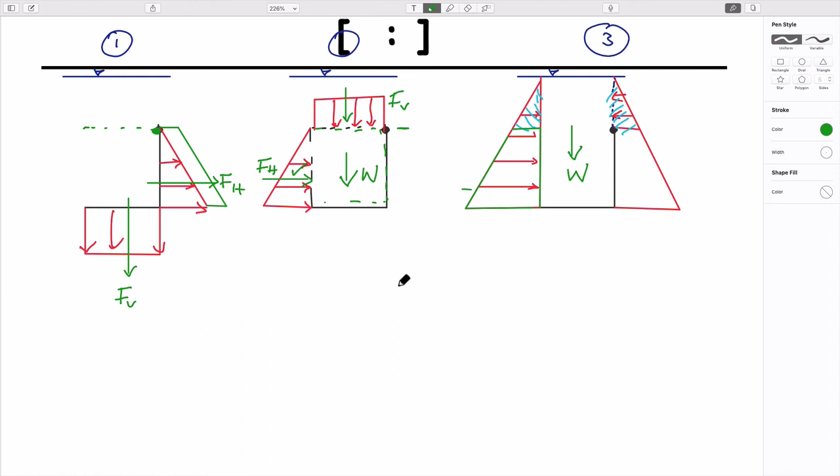Okay, so I hope I didn't confuse things by that. There are multiple ways to do that. Okay, thanks very much.